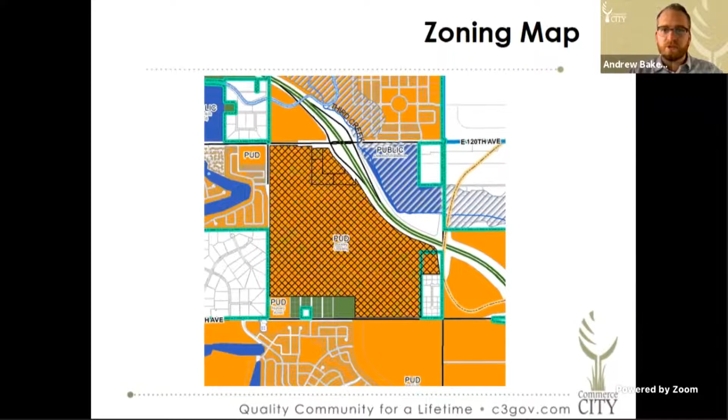This is part of the Buckley Crossing PUD. We have the Reunion residential PUD to the south, as well as the Contour commercial PUD to the north. We have some Adams County residential to the west, as well as the villages at Buffalo Run East PUD to the west. To the east is a Commerce City owned parcel zoned as public, as well as some other Adams County residential properties.

There's an aerial of the parcels. You can see that on the north side, there is some existing single family residential, but the rest of the property is vacant.

These properties were annexed in 1987. They were zoned as the Third Creek Ranch PUD, under case files AN 8687 and Z 46887. That zoning was amended in 2003 under the name Buckley Crossing, which allowed a number of mixed uses, including commercial, residential, and public, as reflected in the comprehensive plan.

Back in 2019, the applicants had submitted a sketch plat to begin discussing the site design, and a few issues came up during that process, which led us to think that a PUD amendment would be necessary.

So they have requested this amendment to the PUD zone document to relocate and resize some of the different planning areas. One of those that became apparent was 27J, instead of wanting an elementary school site, realized that a middle school site was necessary. So instead of the original 25 acres planned in the Buckley Crossing PUD, they requested 35.

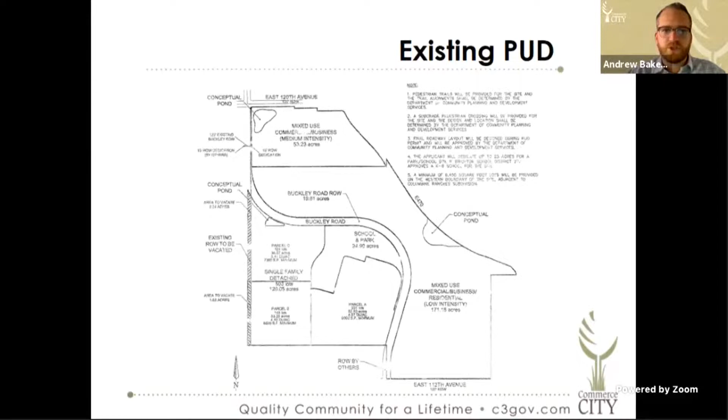So this is the existing original PUD. You can see the exaggerated curvature of what was then called Buckley Road, now called High Plains Parkway. The school and park site being just southwest of that, and a mixed use commercial business area along the entire east side, with mixed use commercial business on the corner of 120th and Buckley Road. All single family detached towards the south in a couple of oddly shaped parcels, just due to the school site and that alignment of Buckley Road.

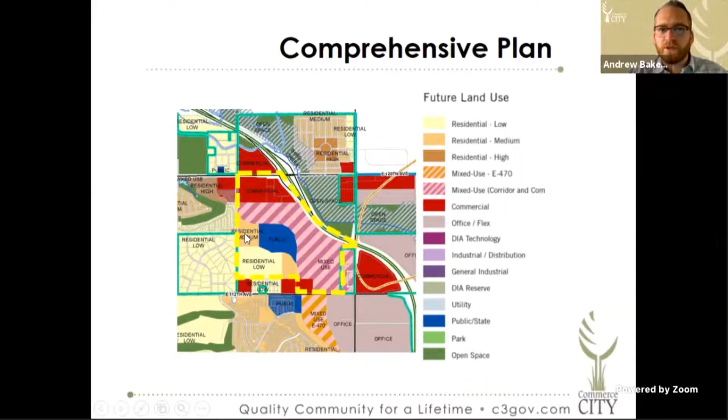So because some of the higher, more dense residential development that could take place within this mixed use area, since we're moving this school site over there, because of that loss of density, we were okay with utilizing that space along High Plains Parkway as a higher density, and allowing smaller lots for that give and take. So you will see that reflected in the new planning area B, which is still single family residential, but is just going to allow smaller lots.

As far as allowed uses go, the only changes are going to include outdoor recreation, community gardens, daycare homes, and then antennas and bed and breakfast as conditional uses. But again, anything else is going to be single family residential, whether that's larger lot, smaller lot, or a single family attached. We have a front and rear loaded product that is conceptualized in there as well.

I also want to note that the larger lots that were allowed in the original PUD, those lot sizes went up to, I believe, up to 7,000 square feet. That's been slightly reduced as well - the largest lots that are going to be allowed in this amendment are 6,000 feet. So in a lot of ways, the much larger lot development is being replaced with some density, and then again that 100-foot pedestrian open space area that we've shown for the Buckley Road right of way that's getting vacated.

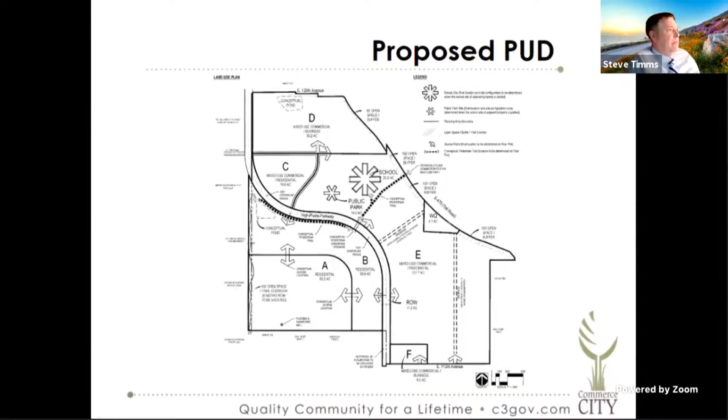I'll answer that—the Avia property is in the city, and actually from a zoning perspective it's zoned multifamily, not single family. So it's all one lot with multiple buildings on it, which is how it's allowed. In terms of the process to update zoning in general, that's in the charter of the city—planning commission, you all, and city council get the ultimate say in that.

You know what they call Avia now is horizontal apartments, and it's a big deal. Phoenix and Florida specifically have done extremely well with that, and it offers our community a living venue that hasn't been there and isn't in most communities. You bring in a nicer family that doesn't necessarily want to rent but does want a single family house, with higher income—it's a great process. So I certainly support encouraging that, and reducing the lot sizes and setbacks, I think, is a good change on this.

Thank you, Mr. McCamick. Any further questions from the commissioners for staff? Did we want to pull the applicant forward?

Andrew, is it Scott presenting for the applicant? Yeah, I think I'm here now. Can everybody hear me? Yes. I think I'm on, okay.

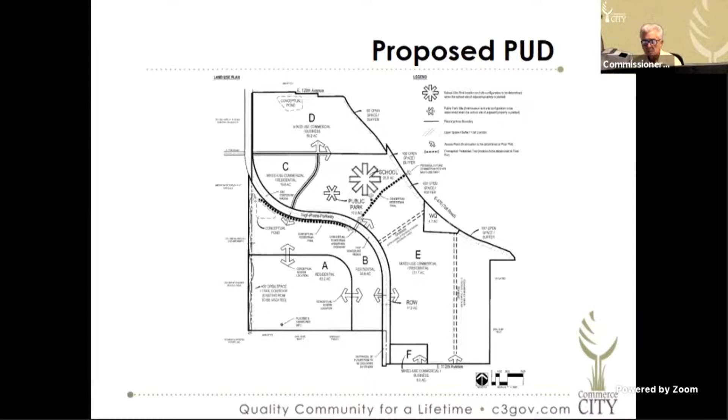Okay, and how? If you look at the plan on the board right now, because the school district wanted some design flexibility in exactly how the school was laid out, that line may shift around a little bit. So rather than put a hard line boundary in, we put those two stars. Our intention is that in the sketch plat process, we'll work with the school district to make the boundary of their school hard line. But they didn't want to spend the money right now to determine something for the future. So we committed in the PUD that they're going to get 35 acres, and the exact hard boundary of that 35 acres is to be determined in the sketch plat. Okay, gotcha. So the school district is going to weigh in on how close this mixed-use commercial development is to the school. That's correct. Excellent, thank you for answering my question.

Okay, thank you, Mr. Yost. Any further questions from the commissioners for the applicant? I'd just like to congratulate the Carlson Group and everyone you work with, Scott. I know your dad, you guys were great in helping us get started on the Landing Place Church, and I know you've done a tremendous amount of good things in our community here in Brighton and everywhere. I think this is a great plan, keep working with us. You've done a good job. We appreciate that big time. Thank you very much.

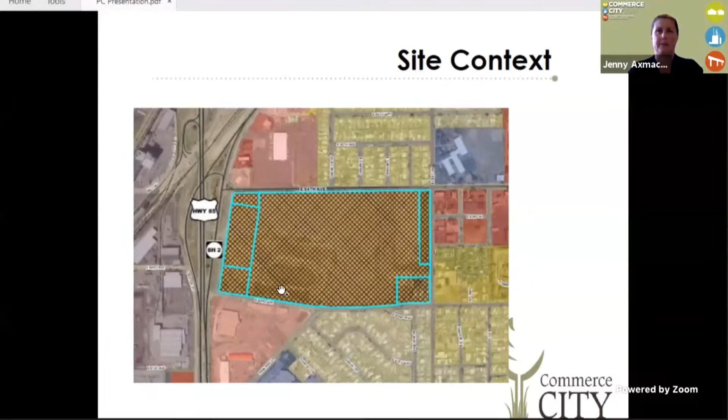The future land use plan has this site designated for mixed use, commercial and corridor. The comprehensive plan specifically talks about this property, identifying the former Wembley site or Mile High Greyhound Park site for redevelopment as a mixed use project. Mixed use is a mix of residential, retail, commercial, and office uses, either vertical or horizontally mixed, and is intended for urban environments. This site is also designated within the comprehensive plan as a regional commercial center, which includes a mix of uses with appropriate transitions, shared plazas and clustered buildings, visual interest, and is intended also for urban environments.

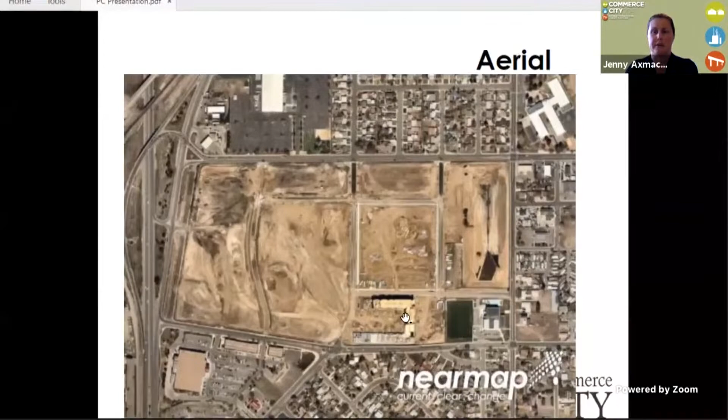So here's a fairly recent aerial of the site. You'll see we've got Parkway coming up from the south. This is 62nd and 64th. They're hard at work on the infrastructure within the property. And if you've driven by lately, there's a 4-story building that is coming out of the ground, which is exciting to see.

So the case history for this site: the Greyhound Park racing ended in 2008. The Commerce City Urban Renewal Authority purchased the property in 2011. The former racetrack was demolished in 2013. This was originally rezoned from C3 to PUD in 2017, and the property was platted with a master infrastructure plat in 2020.

So the request tonight is to amend the PUD to update the commercial and institutional uses on parcels A and B, that western portion of the site. This is in order to provide the flexibility to maximize the use of the land and provide the best design and layout possible. So there are 10 sheets in the original Mile High Greyhound Park PUD.

We're only amending 2 of them this evening. Sheet 1 is being updated to have the same legal description, but new signature pages. Sheet 6, which has the allowable uses, is also being updated. Sheet 2, which is the narrative, sheet 3, which is existing conditions, sheet 4, visual depiction of planning areas, bulk standards, and the cross sections will not change.

So this layout shows you the planning areas within that approved PUD. The only planning areas that any changes will occur to with this first amendment is the institutional use parcel A and the commercial use parcel B. The rest of these parcels will not have any changes. It's also important to point out the CCURA retained ownership of parcels A and B. The rest of the site, the eastern portion, was sold to a master developer.

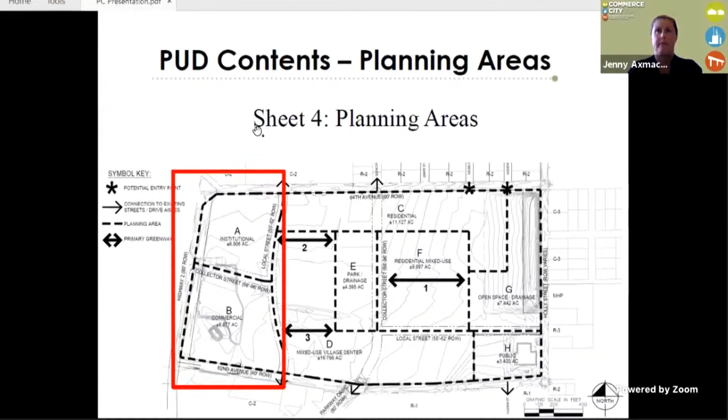This allows land uses for parcels A and B to be expanded. No changes to the residential area. Parcel A will include additional harmonious commercial uses, such as hotel use, conference or event space, standalone retail development, and true vertical mixed use. Horizontal mixed use would not be allowed.

In parcel B, we're also adding that component for vertical mixed use, vocational training centers, and that additional conference or event space as well.

So amendment number 1 consists only of 2 sheets. It replaces sheet 1, which I spoke about earlier, with updated signature blocks, and replaces sheet 6, the land use table, with sheet 2 of this amendment. It includes an updated land use table, and the changes are highlighted on that land use table. No other sheets are being altered.

Those existing regulations will remain in effect as originally proposed. There won't be any changes to bulk standards, parking standards, cross sections, or open space requirements, and there'll be no alterations to the approved design standards as part of this.

Here's the latest conceptual design for the build out of the entire Mile High Greyhound Park. You can see Parkway extending to Glencoe, moving through the center of the site. There's a central park, and multifamily market rate development on this western portion.

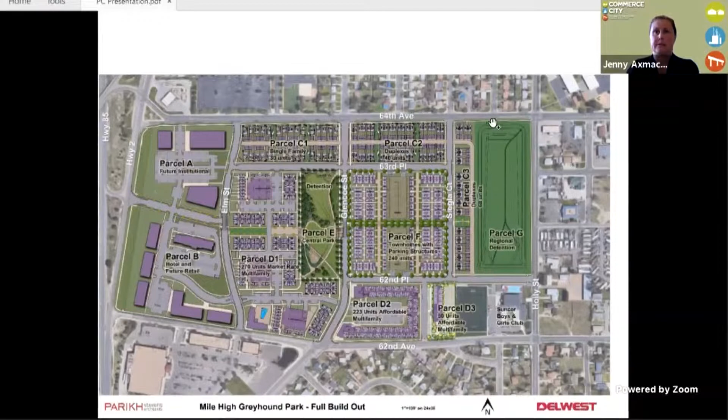We've approved a plat for 30 single family homes on this C1 to the north, and a plat for 20 duplexes consisting of 40 units on C2 to the north. There's parcel F, which has a townhome with above ground structured parking under review. We've approved 223 units of affordable multifamily on parcel D2. There'll be future development on D3 in this area, and I believe additional development in C3 to be submitted. There's the regional detention pond on the far east side.

The CCURA, in looking at preparing parcels A and B for development, contacted HOK Design Group and had them go through a scenario planning exercise to see, with the parking requirements associated with the site, a best fit analysis for the development of parcels A and B.

While the institutional use is still a critical component of this development, the conceptual design exercise showed that it might actually fit better on parcel B as opposed to parcel A. This is the preferred concept this design group came up with. It has the institutional use here, a hotel use, some shared parking in the middle, and then retail on the hard corner, with additional retail on parcel A to the north, and the potential for a future conference or event center up here as well.

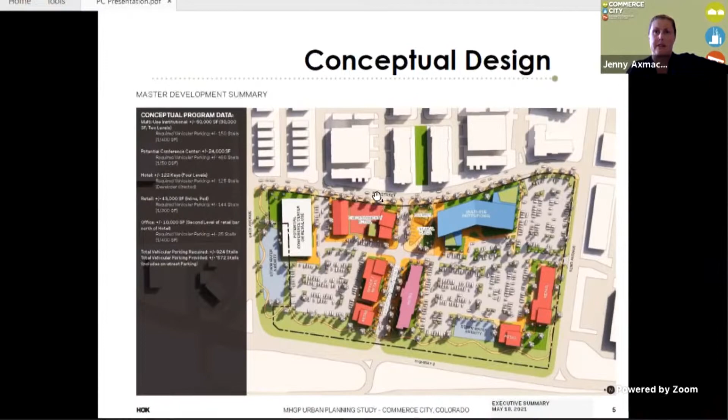And then some entertainment retail across the street from the proposed multifamily development.

Public notice required for this case was completed. Signs were posted, adjacent property owners were notified by postcard, and it was posted in the Sentinel. As of this date, staff has received no requests for additional information. The proposed PUD zone document meets the approval criteria of section 21-3251 of the Land Development Code, and therefore the DRT recommends the Planning Commission vote to forward this request to City Council with a favorable recommendation. I would be happy to answer any questions.

And the applicant is me as well. Thank you, Jenny. Questions from the commissioners or staff? I have a question for you, Jenny.

Do you have tenants or buyers for those places, people that have committed? In the development world, and certainly in the financing world, you don't want to start making changes until you know what its ultimate use is going to be. You don't build a shopping center until you have tenants, and you don't build an apartment house until you know there's a need for housing in the community. Do you have tenants, or do you have uses online and in negotiation for these uses?

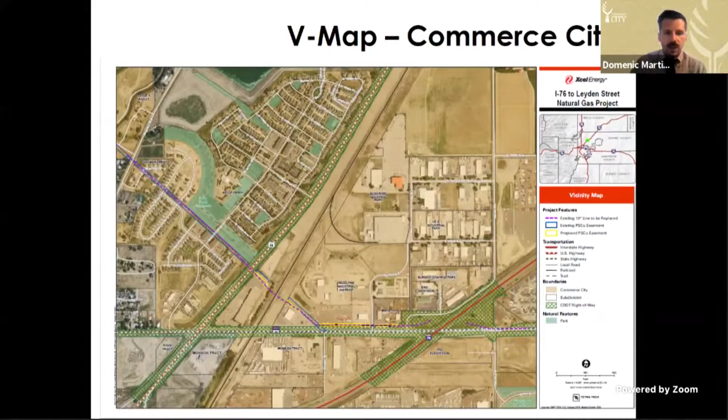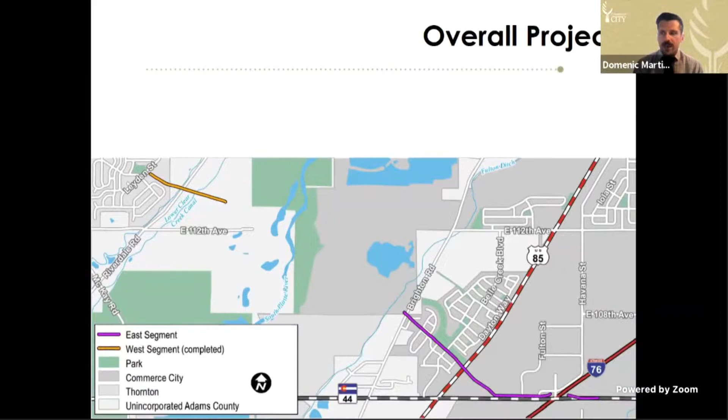This is one portion of an overall project that Xcel is doing in regards to federal regulations from PHMSA. Basically this portion is the alignment that goes through Commerce City boundaries. There is an additional west alignment that covers portions in adjacent Thornton.

The zoning map shows that the properties where this goes through are residential, PUD, industrial, and public right-of-way. The future land uses for this alignment vary, but generally include medium residential, public park space, as well as general industrial areas and right-of-way for the permanence of the city's development.

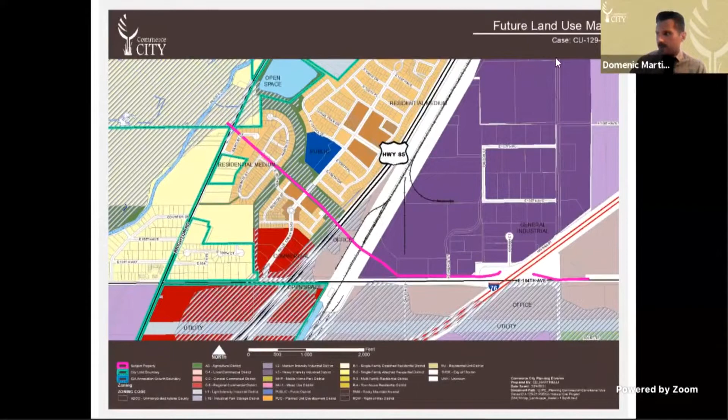The history and purpose of this case: this has been an existing 10-inch natural gas pipeline that's been in place since the early 1950s. There's been a rule conducted by the Pipeline and Hazardous Materials Safety Administration, PHMSA, a mega rule passed last year that required additional reporting requirements and testing for natural gas pipelines all across America.

I'll let the applicant get into more detail on the specific reasons this portion of the pipeline is being replaced under the mega rule, but federal regulations do mandate the replacement of the portions of the pipeline that the Planning Commission is reviewing tonight.

All the development in the area developed around the existing pipeline corridor and alignment. There's been no history of leaks, accidents, or spills to the city's knowledge as it pertains to this portion of the pipeline. The applicant does not need to obtain additional right-of-way or easements for this pipeline, except for one small portion under the Union Pacific Railroad, which we'll cover in more detail later.

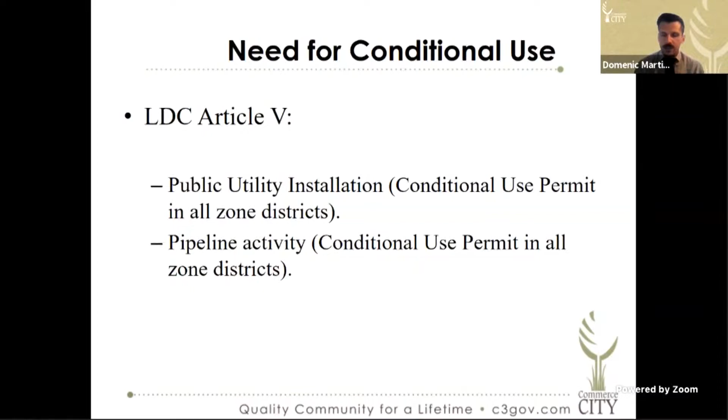The need for the conditional use permit: within the Land Development Code in Article 5, the land use table specifies that public use utility installations and pipeline activities require a conditional use permit in any zone district.

To provide an update on the statistics: the approximate pipeline length in the city is 1 mile, the pipeline diameter is 10 inches. As for the approximate width of construction, the majority of the pipeline alignment has at least 30 feet of permanent easement on each side. There are a number of portions that exceed this, but the minimum is 30 feet. The pipeline cover depth is proposed to be 4 feet, and many of these conditions are still in place from the previous pipeline.

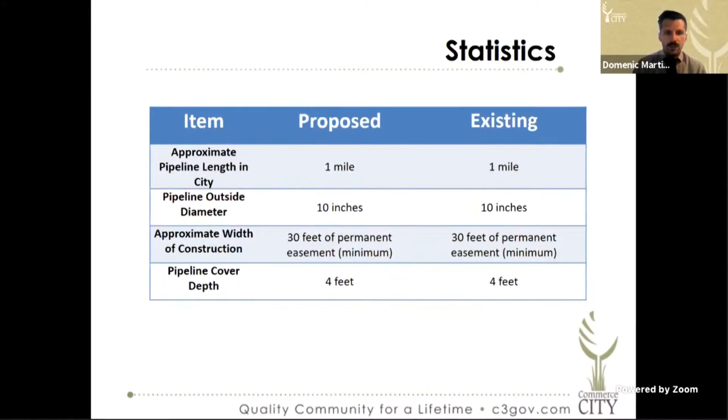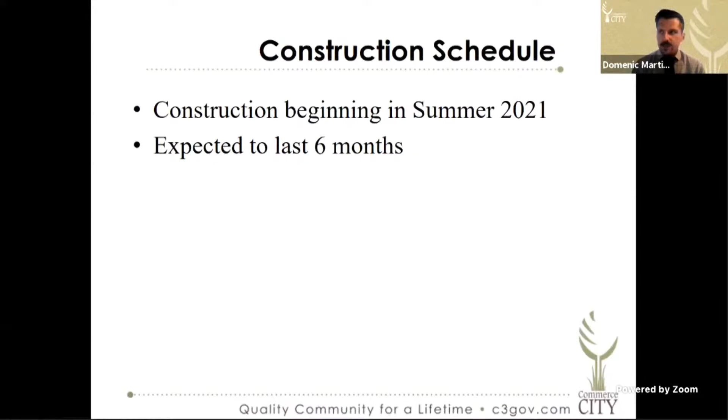The construction schedule: construction is planned to begin in summer 2021 following the approval of city land use applications, and then construction is expected to last 6 months.

There are a number of regulatory agencies reviewing this application in addition to the city, which includes the U.S. Army Corps of Engineers, PHMSA, the Colorado Department of Public Health and Environment from the Air Pollution Control Division, the Water Quality Control Division, the Hazardous Materials and Waste Management Division, the Colorado Department of Transportation, as well as the city.

There were a number of external agencies that were reviewed on this case, which includes United Power, Xcel, Tri-County Health Department, CDOT, and South Adams County Fire Protection District. There were no significant concerns that were raised in the review of this application.

Just an overview of the additional required permits that this pipeline will need to obtain prior to construction. Through CDPHE, they need to obtain a general construction stormwater permit, a construction dewatering permit, a hydrostatic testing permit, and then with CDOT, they need to get special use permit applications for installation within right-of-way. And then with the city, in addition to the conditional use permit...

There are a number of portions of the pipeline alignment that do cross within the Commerce City's floodplain. They will need to obtain right-of-way permits wherever the pipeline crosses city right-of-way, which is multiple points along the route, as well as grading permits for any of the disturbance that occurs in the replacement of the pipeline.

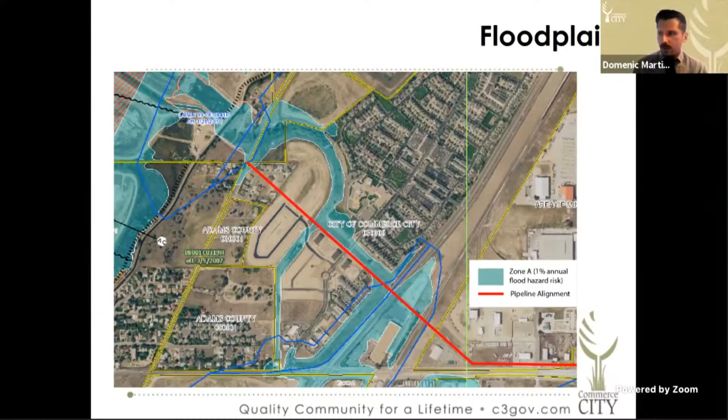Just an overview of this, you can see where the pipeline alignment crosses through the floodplain. This is generally within Belle Creek in the portion of the park area, and the drainage flows through there. There are some additional portions east of US 85 where it does cross the floodplain. The applicant has applied for this permit, but has not yet been approved.

So proximity to residential, we'll cover this in a little bit more depth. As we mentioned, there's a 30-foot easement width minimum throughout the project with 15 feet on each side. And then there's at least 40 feet from property boundary to pipeline center line in Belle Creek. And then there is one portion within the existing Claybar Creek neighborhood where there's 30 feet from the center line of the pipeline to the edge of the home.

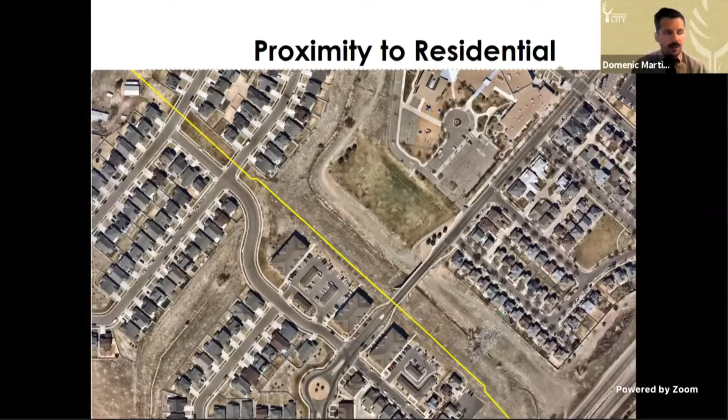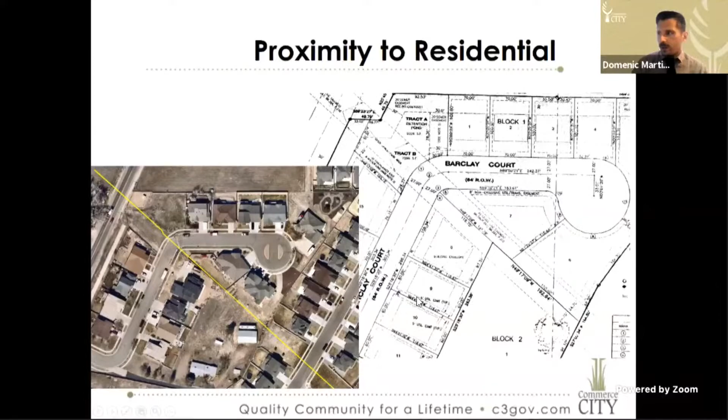You can kind of see here the alignment as it crosses through Belle Creek, and keep in mind this is already an existing pipeline that is in place. The portion here shows the alignment as it crosses through the Claybar Creek residential subdivision. This subdivision was platted in 2003 and accounted for, I believe, at least a 30-foot easement on each side. You can kind of see generally as it crosses through these homes right at the corner of Barclay Court. There is a sufficient easement that's in place for that.

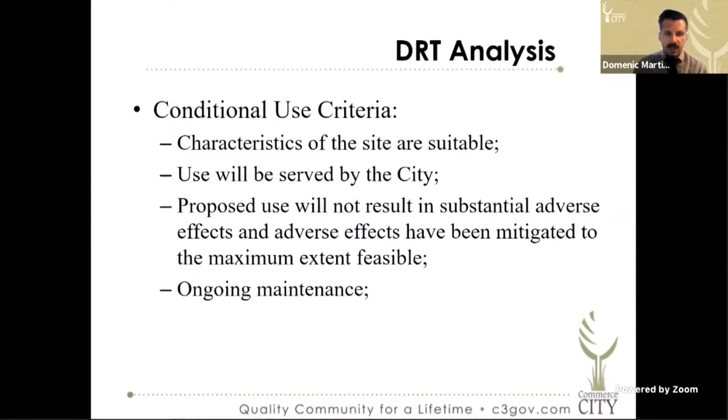In the development review team's analysis of this case, the development review team and city staff considered the characteristics of the site, that the use will be served by the city. The proposed use would not result in substantial adverse effects, and adverse effects have been mitigated to the maximum extent feasible. There's provisions for ongoing maintenance. The use does not violate federal, state, or local requirements.

There is a need for the existing community, and there's a community need for the proposed application. There's a number of proposed changes that improve level of service, reduce energy use and carbon footprint, and provide service for existing and future development.

There was a public virtual neighborhood meeting that was held on April 15th. This was held remote due to the ongoing coronavirus pandemic. There were 12 members of the public in attendance that night. There was a website with information that Xcel has maintained throughout this project, which can be found at myxcelenergy.com, and there was no additional request for information since this neighborhood meeting was held.

For required public notification, there was a notification radius of 500 feet from the pipeline alignment, which ultimately ended up being 283 adjacent property owners notified, including the adjacent Belle Creek charter school and a number of other residential uses. There were 8 signs posted at each intersection where the pipeline crossed, and there was a publication placed within the Commerce City Sentinel Express.

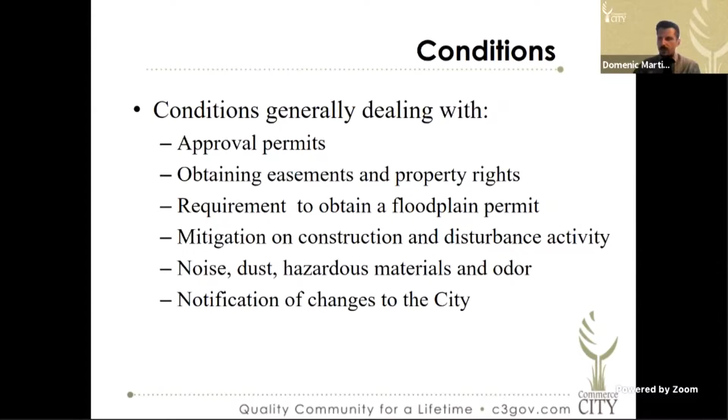There are a number of conditions that generally deal with the approval of permits, obtaining easements and property rights, the requirement to obtain a floodplain permit, mitigation of construction disturbance activity, noise, dust, hazardous materials, and odor, and notification of changes to the city. The development review team's recommendation is that Planning Commission make a favorable recommendation of this request, subject to the conditions that were included within the staff report tonight.

Staff is available to answer any questions, and the applicant is also present to speak on behalf of PSCO and Xcel.

Thank you, Domenic. Did you get any specifics of means and methods of this replacement, whether they're boring it versus open trenching it, to minimize the impact? Staff's understanding based on the application is it's going to be a combination of both during specific portions of the construction period. When we do bring the applicant in, I'll let them speak more as to what parts will be boring versus open trench on the alignment.

Okay. Mr. Amador? For the staff, on the recommended motion under condition A, it says that the permit holder will comply with development plans dated 6/30/2021, but that hasn't come in yet, or am I confused?

So it should be included within the packet materials as the development plans. I'll double check and ensure that was included within the packet materials tonight. Well, I'm just questioning the date because the plans are dated 6/30/2021, but it's only 6/1/2021. If they're in there, it's Exhibit B, but there's 314 pages. I'll double check that and ensure that's the right document, but that should be a smaller portion. It shouldn't be 314 pages of development plans.